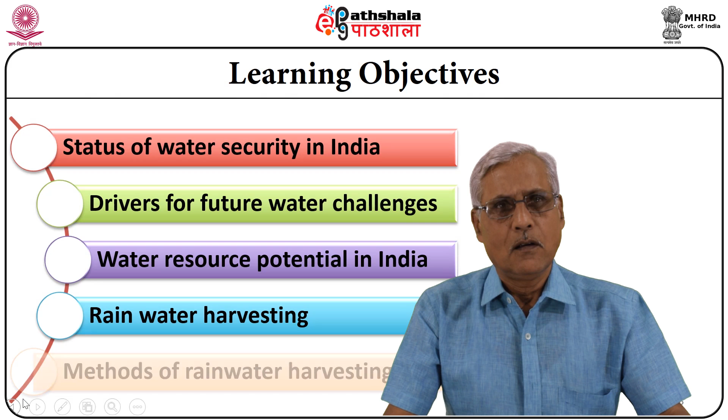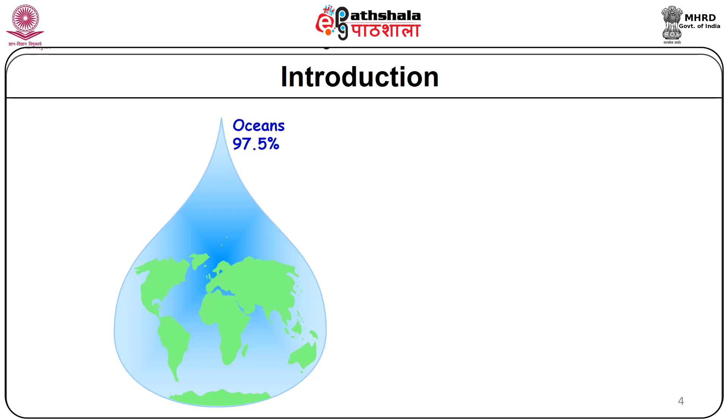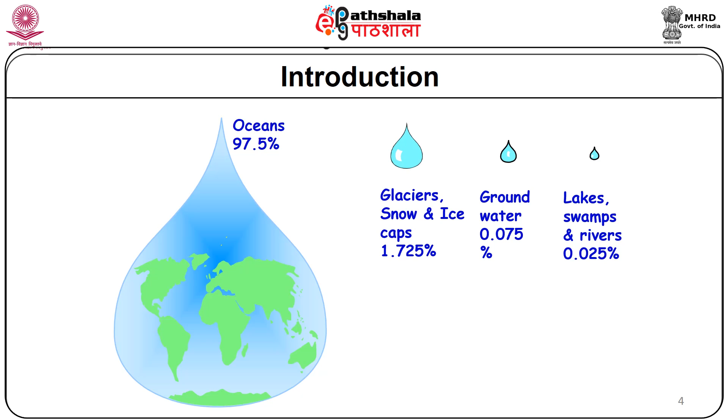As far as distribution of total water is concerned, ocean comprises around 97.5% of the water. Glaciers, snow and ice caps constitute about 1.725% of total water, whereas groundwater just accounts for 0.075%. Lakes, swamps and rivers 0.025%. The world water resources just described clearly show that the fresh water for human consumption is not much.

In the last century, the world population tripled and the use of water grew 6 times. So, water consumption had been much more than the actual population growth. It is estimated that by 2030, the demand for water will be 40% more than it is currently and 50% higher in the most rapidly developing countries that include India and China.

Population increase is likely to lead to mismatch in the demand and supply of water, and by 2030 the world population is projected to reach 7.5 billion on the low estimate side, and it is estimated to be 9 billion on medium estimate by the year 2050 from the current level of 6.7 billion people. These estimates were given by the United Nations in the year 2004. The bulk of population increase will be in countries already experiencing water shortages. Such a situation as far as water supply is concerned is going to be seriously jeopardized in the coming future.

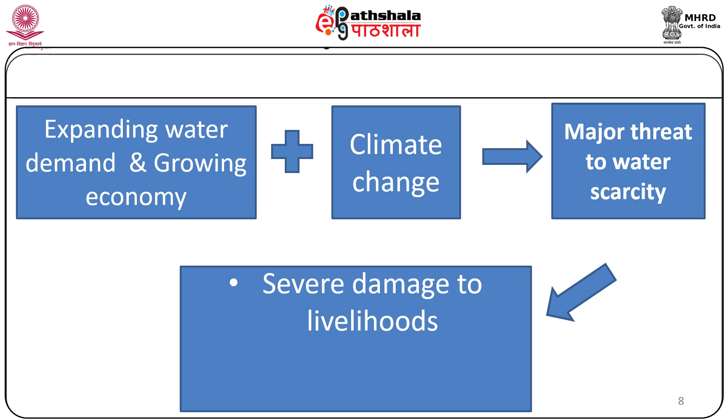According to the United Nations Human Development Report 2006, Beyond Scarcity: Power, Poverty and the Global Water Crisis, water availability per person, supply, was decreasing, while at the same time the amount of water that each person was using, demand, was increasing.

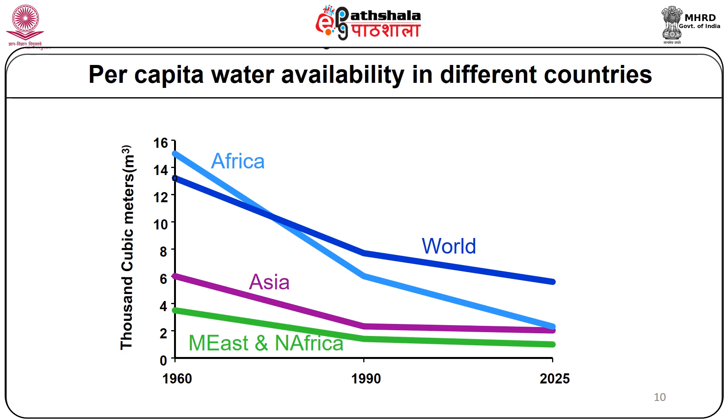In this graph, we are discussing per capita water availability in different countries, and there are three points particularly we would like to see: 1960, 1990 and 2025. Then, 1000 cubic meters is taken as the unit, and the figure clearly says that

Africa, world, Asia, Middle East, North Africa, all countries had water availability ranging from nearly 4 to more than 15,000 cubic meters. Middle East and North Africa has the least. Asia was in between, and Africa had more water.

But in 1990, the range has shrunk from 2 to around 8, and it's likely that by 2025, the entire range of water availability in the different countries just mentioned will range from 1.5 to around 7,000 cubic meters. So the point that emerges here is that the water availability has nearly been halved from 1960 to 1990, and it is likely to be jeopardized by the year 2025.

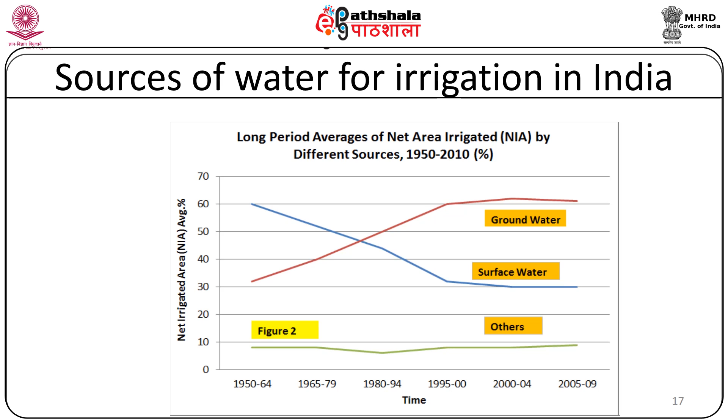So there has been a significant, perceptible decline in the use of surface water for irrigation in India, because most of the surface water has not been available. There has been huge extraction, almost doubled in terms of percentages, of groundwater for the purpose of irrigation in India.

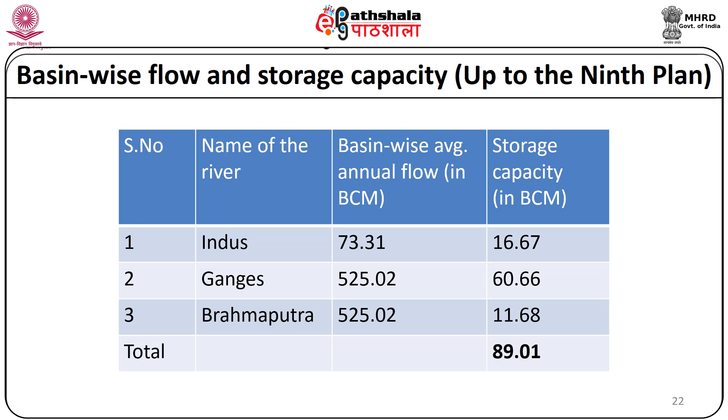Basin-wise flow and storage capacity up to the 9th plan: Indus basin-wise average annual flow 73.31, Ganges 525.02, Brahmaputra 525.02. Storage capacity 16.67 BCM, 60.6 in Ganges and 11.6 in Brahmaputra.

Low agricultural water productivity and efficiency in India would make severe supply-demand gaps with currently planned crop choices. This is based on the report Charting Our Water Future by 2030 Water Resources Group 2009. Water security for India is emerging as an extreme urgency. Water security for India implies effective responses to the changing water in terms of quality, in terms of quantity, and in terms of uneven distribution.

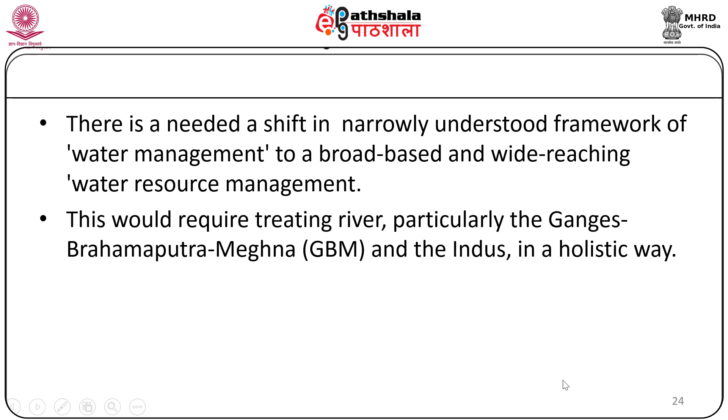There is a need to shift from a narrowly understood framework of water management to a broad-based and wide-reaching water resource management. Because, as the earlier discussion clearly highlights, the supply and demand gap as far as water for human consumption is concerned, or water for use in the agriculture sector, or water for general development, is alarming, and therefore water resource management becomes of paramount importance. This will require treating rivers, particularly the Ganges, Brahmaputra, Meghna, and Indus, in a holistic way.

So, after discussing the situation of water security globally as well as in India, and with special reference to our country, we have to think in terms of recharging mechanisms or conserving water resources, and rain is the principal source of water. Therefore, rainwater harvesting becomes very important.

Rainwater harvesting is defined as the activity of collection and storage of rainwater, as well as other activities aimed at harvesting and conserving surface and groundwater, preventing loss through evaporation and seepage, and other hydrological studies and engineering interventions, aiming at the most efficient utilization of rainwater towards best use for humanity.

Rainwater harvesting is the collection and storage of rainwater for reuse on site rather than allowing it to run off. Most of the rainwater just goes as runoff into the river and then ultimately into the ocean. But here the purpose of rainwater conservation is to store the water at the place so that it can be reused on site.

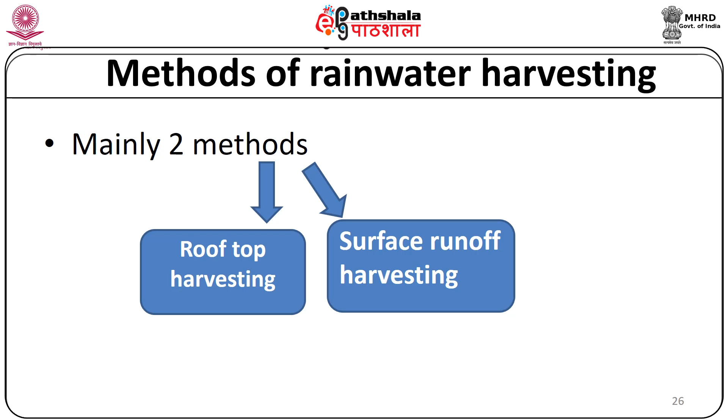Methods of rainwater harvesting can be classified into two ways: rooftop harvesting, that's number one, and surface runoff harvesting. Surface runoff: when rainwater flows on the surface of the earth, it is called surface runoff. It is the excess amount of water that cannot be absorbed by Mother Earth, also called overland flow.

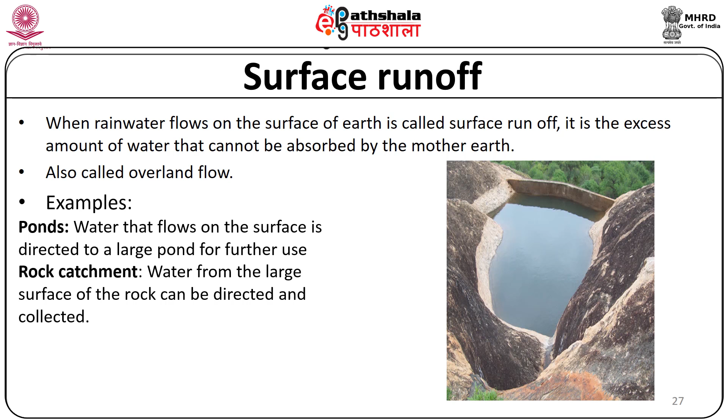Rooftop rainwater harvesting: rainwater is captured when it falls on the rooftop of a building or a house. The roof serves as the catchment area, from where rainwater is directed to a tank or other storage pots. It can either be stored in a tank or diverted to artificial recharge systems.

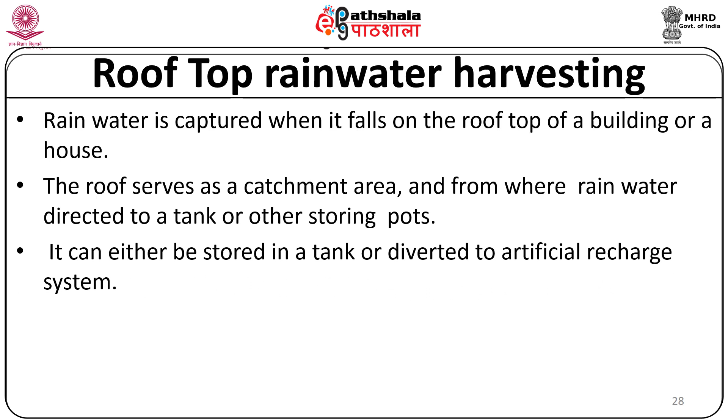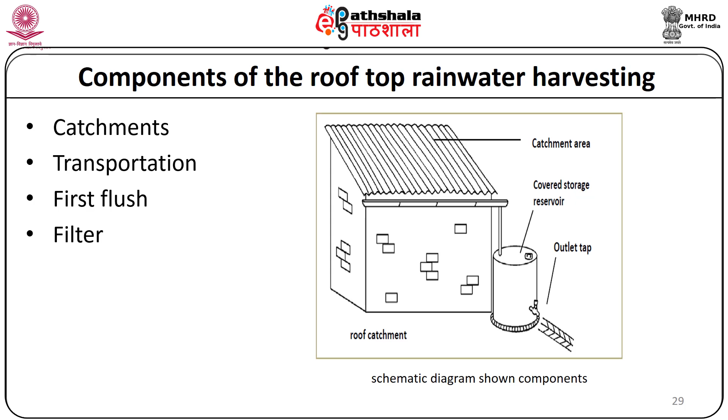Components of rooftop rainwater harvesting are catchments, that is the top roof. Then we have the transportation system. Then we have first flush, covered storage reservoir, filter, and outlet tap from where the water can be stored at a particular place.

Catchment area is the surface which receives the rainwater directly at the rooftop. This actually determines the amount of water for harvesting. The roof of a house mainly serves as the catchment, or other surface areas like the courtyard and terrace.

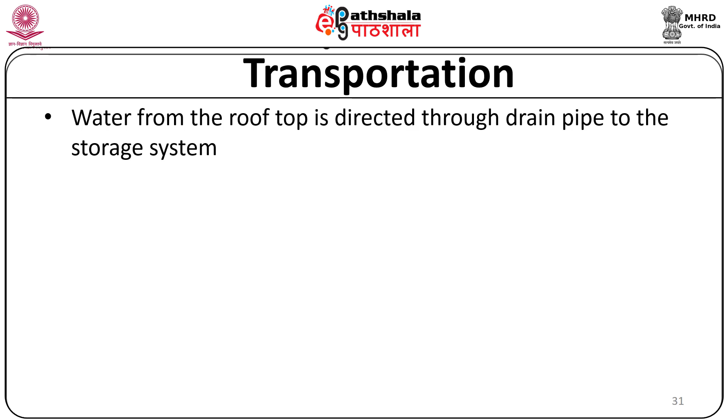Transportation: water from the rooftop is directed through the drain pipe to the storage system. So whatever water is collected on the rooftop is directed through the drain pipe to the storage system, and that water can be used in future. It is better if the pipes are ultraviolet ray resistant. Gutters and downtake pipes are needed for the water from slanting rooftops.

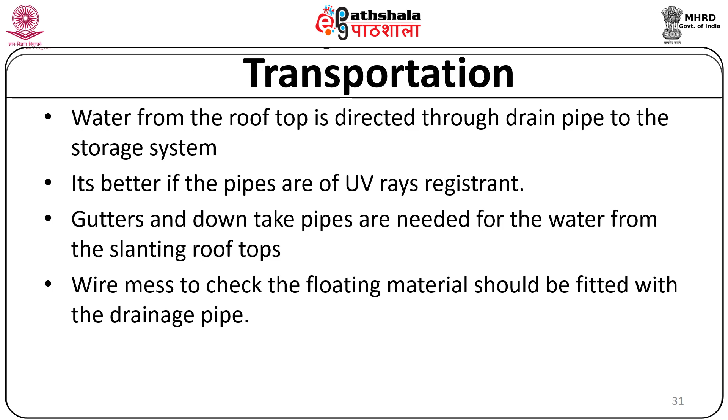Wire mesh to check the floating materials should be fitted with the drainage pipe. If the wire mesh system is not there, then many articles can go in the pipe and choke it. When the water from the rooftop is passed through the pipes, there are many problems in the water that is initially collected.

The initial part of the water has a lot of contaminants, because on the roof there will be many particles, many items that may contaminate the first flush. That is why it becomes important that water collected with the first shower should be discarded, as this water contains contaminants from the rooftop, and to avoid possible environmental contaminants.

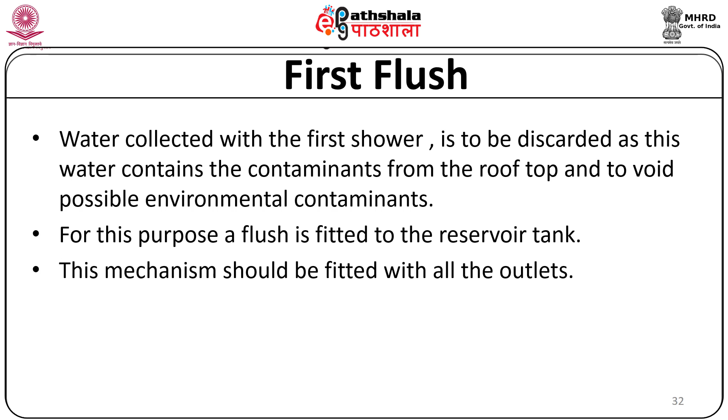So when we are contemplating storage of rainwater, we should take care that the first part of the rainwater is discarded, because it's likely to be contaminated. For this purpose, a flush is fitted to the reservoir tank, and the mechanism should be fitted with all the outlets, so that the initial contaminated water, which is known as first flush, is taken care of.

Now, there should be filters also. Ideally the filter is placed at the top of the storage tank and made up of sand, gravel; a nettlon mesh filter may be used for this purpose. Once this filter is in place, larger particles are taken care of; they settle at the top and only water trickles down.

The filter is an important part of the whole system, because it will hold back many solid particles. Water after the first flush should be allowed to enter the filtering process. So one has to take care that the initial first flush is not put on the system, because this will contaminate the filtration process. It may choke, because many particles can come directly in.

Advantages of filters are that they prevent turbidity, excess color, and microorganisms to some extent from entering the storage system. So the filter has a very important role to play, as it does in water purification for human consumption. Turbidity, excess color, and some of the microorganisms are taken care of by filter mechanisms.

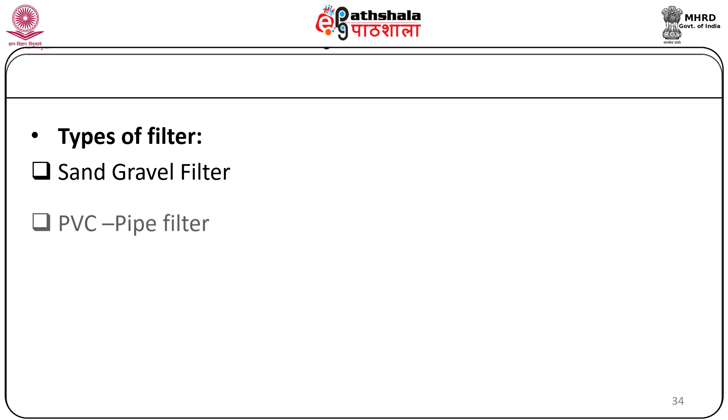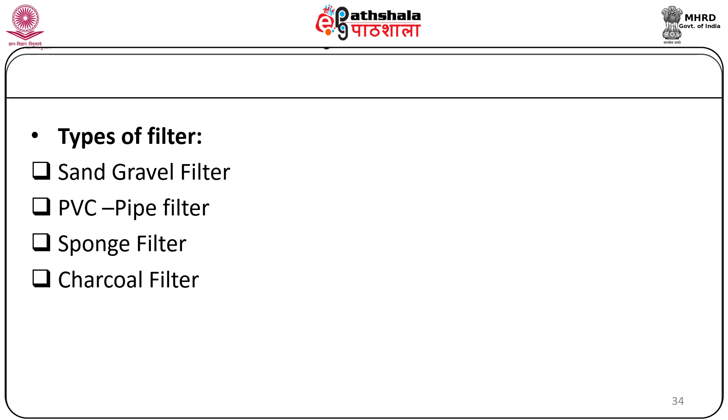Types of filter can be sand gravel filter, PVC pipe filter, sponge filter, and charcoal filter. Basically, we can classify filters into 4 categories. In sand gravel filters, water passes through and impurities are taken care of. In the sand gravel filter, on the top there is sand, then filter, gravel, and then pebbles.

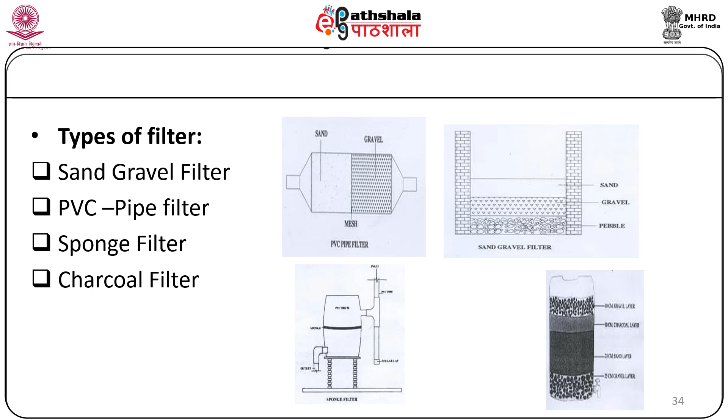Then we have PVC filter and sponge filter, as well as charcoal filters. Each type of filter has different properties, and depending on the situation, the availability of finances and other things, these filters can be used.

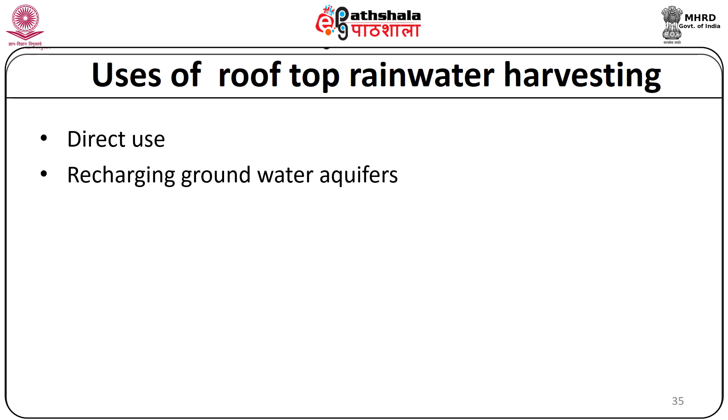Uses of rooftop rainwater harvesting: direct use, recharging groundwater aquifers, recharging of bore wells, recharging pits, and recharging of dug wells. So rooftop rainwater harvesting can play a very significant role in recharging groundwater aquifers, bore wells, dug wells, and pits.

So just to summarize what we have discussed: the principal source of water for human use is very limited, because most of the water, 97%, is present in the ocean, which cannot be used directly or indirectly because of high salinity and salts. The water we have is used for agriculture, industries and other developmental activities, and use is increasing day by day to meet the needs of a growing human population.